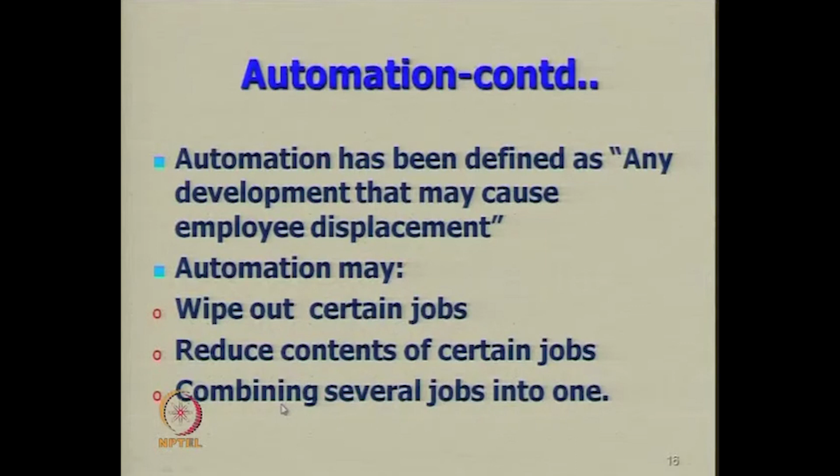And there being no conclusive evidence that it wipes out jobs is perhaps true only to the extent that it applies to the word 'certain jobs'. Yes, certain jobs are wiped out, but other jobs may be created. It reduces the contents of certain jobs, which it does. Remember what I told you in the preceding session, the character of job descriptions change. It could also combine several jobs into one.

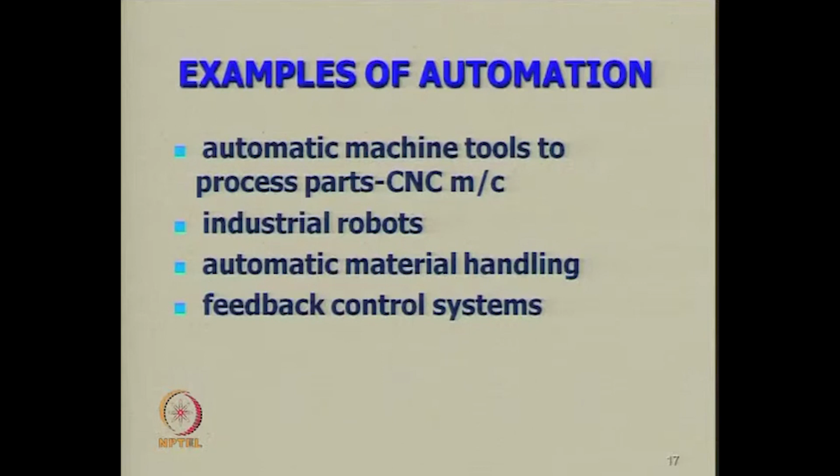Examples of automation are automatic machine tools to process parts, that is CNC, industrial robots, automatic material handling, feedback control systems. These examples are fairly self-explanatory and we need not spend time elaborating them.

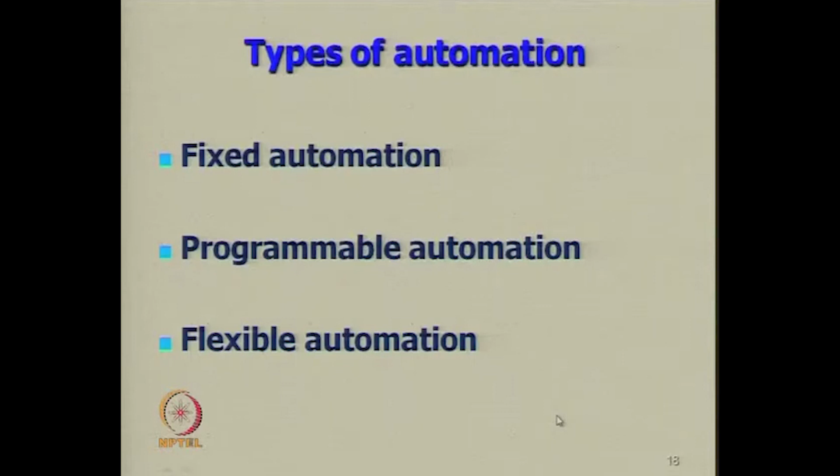There are different types of automation: fixed automation, programmable automation, flexible automation. And it is not as if these are the only possible types of automation, there can be other types.

Fixed automation refers to the use of custom engineered, that is, special purpose equipment to automate a fixed sequence of processing or assembly operations. This is also called hard automation. The primary drawbacks are the large initial investments in equipment and the relative inflexibility. GE is 2 million light bulbs.

Programmable automation is when the equipment is designed to accommodate a specific class of product changes, and the processing or assembly operation can be changed by modifying the control program. There is a technical meaning to programmable automation, just as there is to the other two types. It is suited to batch production. Reconfiguring the system for a new product is time consuming because it involves reprogramming setup for machines and new fixtures and tools.

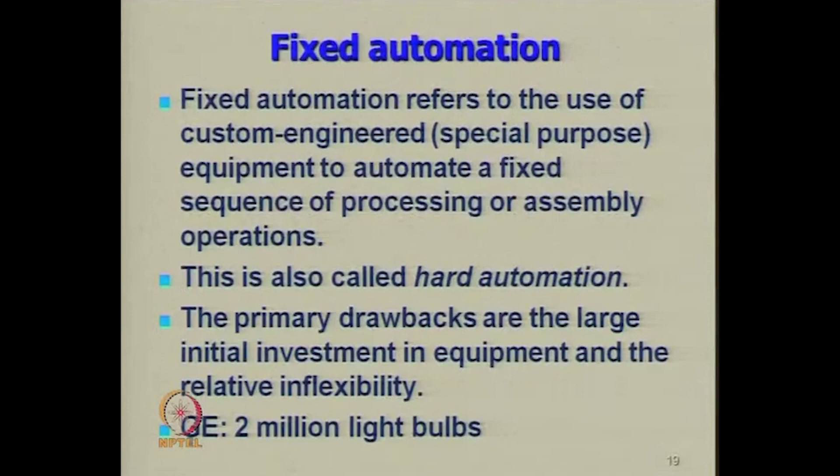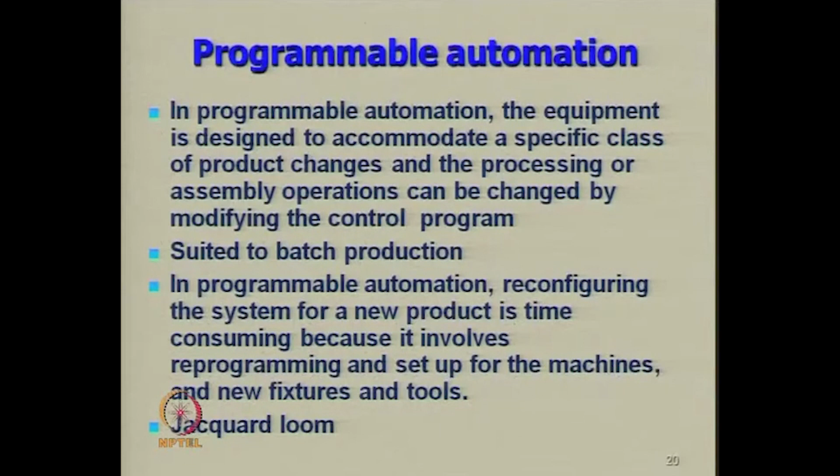All that you have to keep in mind is organizations which deal with flexible automation will be designed differently from those designed for fixed automation. Fixed automation will give rise to one class of organization design, programmable automation to another kind, and flexible automation to yet a third type. Therefore, the proposition you need to register is that organization structure and processes will reflect the kind of technology.

Now, for those of you interested in supply chain management, you can hardly be an expert without understanding organization structure and processes, because to operate that kind of supply chain management, you need a kind of organization whose nature has to be understood even by the technical hand. A little while ago, I was in conversation with two others who claimed they were interested in supply chain management, but they have a total inability to understand how supply chain management works, where the triggers of control are, and the triggers of control will always be in organizations.

So, types of automation, advantages and disadvantages. Let us put it in a matrix form. Automation, we have just noticed, can be fixed, programmable, flexible. The chart talks of when to consider, what are the advantages and what are the disadvantages. I am going to leave it on the screen for a while for you to read through, and then I will make some comments.

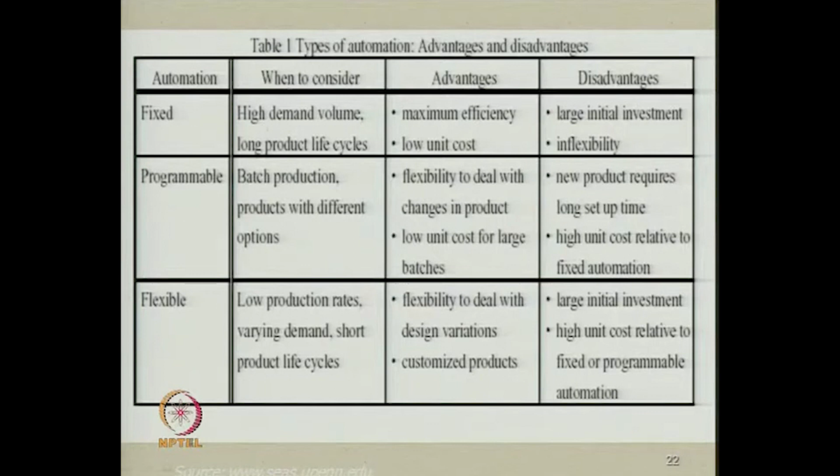Now, it is important to understand this matrix because it helps you to register concerns of project selection. If you want to start a unit, what kind of investment capability you have will be a prime determinant of what kind of plant you want to set up. And your selection of the kind of technology for that plant will, up to a point, be determined by your ability to understand types of automation, advantages and disadvantages.

So, the whole thing about organization management is the ability to understand interfaces. And in fact, to be outstanding in your own functional choice, a sound basis and insight into the processes of organization management is an absolute must.

Now, let us look at the issues of product variety and production volume.

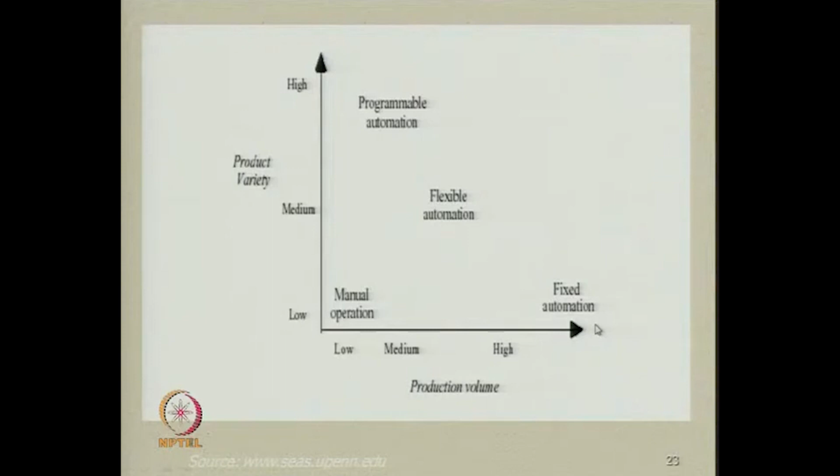There can be many reasons for automation. Shortage of labor of certain type. There may not be an absolute shortage of labor, but there may be a shortage of labor of a particular type. For example, in south of England, there is a shortage of masons. In USA, there is a shortage of nurses.

In fact, your best chance for migrating abroad is to pretend you are a nurse. And if you do not get my tongue in cheek comment, of course, I have no use of making that comment.

Labor, like money, rushes to fill the shortage points. Flow of capital is always from centers of high concentration of capital to centers of low capital availability. That is a law which applies not only to capital, it also applies to labor. Only thing is that the surplus and the shortage would not be judged on the ethnic dimension.

You won't say, we want more Indians to migrate or we want more Bangladeshis to migrate. You would say we want more masons to migrate, and the immigration policy of any state has to do with plugging in the shortage areas or the high cost of labor.

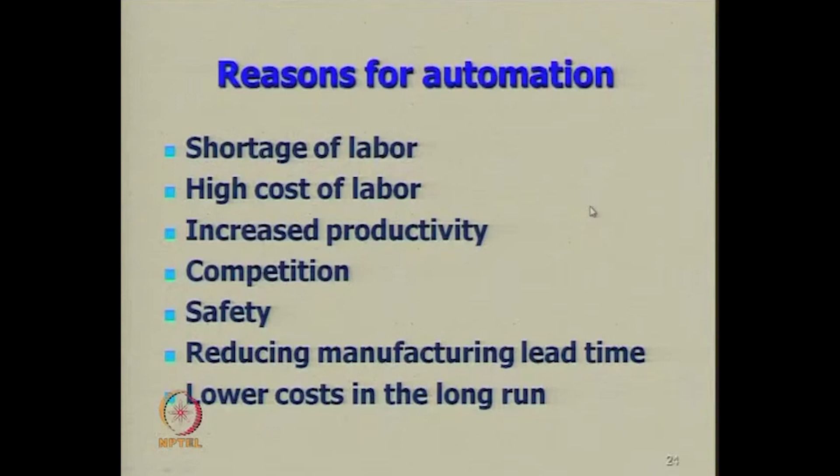So, predictably, if there are certain preconditions when there is a reason for automation, the reverse of that will cause a resistance to automation. If you do not have a shortage at a certain level and you introduce automation, then there will be a resistance.

Cost of upgraded labor also leads to a situation where there is a resistance to automation. In other words, the issue of new skills will be a resistance to automation, because automation can only be on predictable skills. Automation can only be on replicable skills. Automation can only be in skills which have got predetermined contours.

It will be also a factor of initial investment. Management of process improvements, issues of re-engineering.

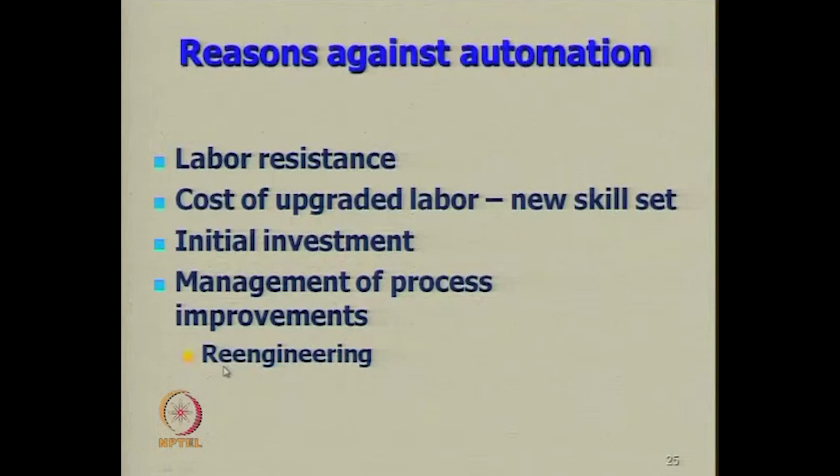Adapting organization to a new technology is always a complicated issue. Changes may come in two ways: policy decision to modify objective to get more advanced system of production, and standardization of product. Result of technical and administrative development, which will require a readjustment period and degree of technological potential attained. Both these factors would lead to adapting organizations to new technologies: policy decisions and wanting more advanced systems of production, or results of technical and administrative developments.

The impact of technology could be in the form of disproportionate time spent on evaluating technical aspects in comparison to study its effect on organizations. Ways to avoid discrepancies: change technology to adapt to organization structure. We have already discussed that when we were looking at different modes of production.

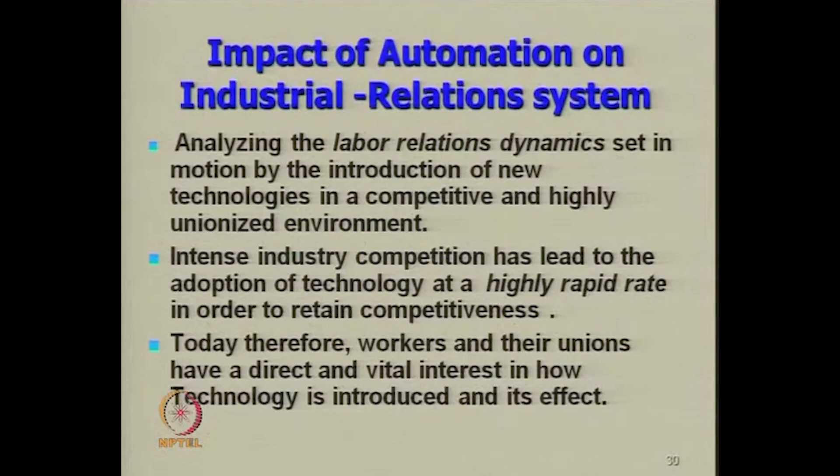Today, therefore, workers and their unions have direct or vital interest on how the technology is going to be introduced and what will be the range of its effect. Usually, you will find even if a technology is introduced at the bottom of the pyramid, it will affect the characteristics of the job above the bottom level too. That would be a bottom up effect.

What shapes the decisions of an employer to invest in automation? Will unions impede the diffusion of automation, and to what degree, if any? What impact will unions have on lag between the introduction on commercially available automation and its diffusion in manufacturing? The experience varies from industry to industry.

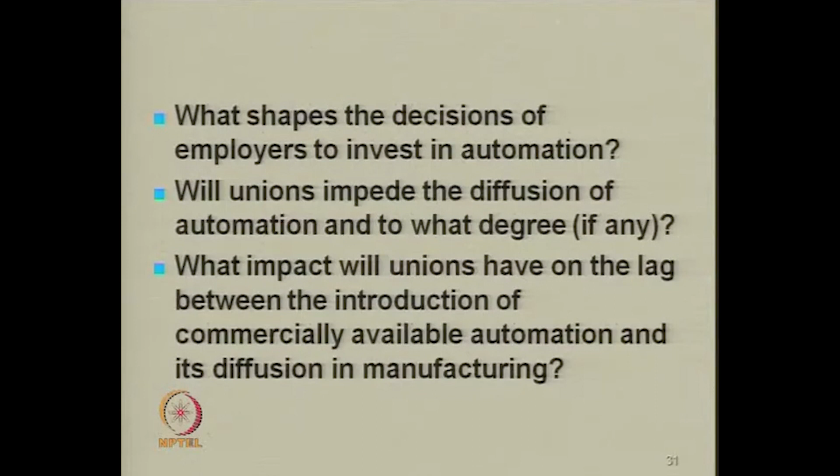It is very high in certain industries. For example, this question is now almost a moot one in telecom technology. The role of unions there has been reduced to less than 10% of the total impact, but it is still very high in certain other industries. So this question is only to be answered in the context of the specific industry, the constancy of prerequisites, and the consequences of effects.

What is the worker's perspective? What will be the degree of displacement? What happens to displaced workers? What proportion will be retained by employers? How many will be laid off? What kind of changes in work rules will unions seek, and what kind of changes will unions gain? What will white collar workers seek? Will white collar workers seek union representation?

What has happened over a period of time is that these kinds of questions have been politicized, and when they have been politicized, you find that they have become a political stick to beat a decision with.

The recent example of the agitation with the airport authority when the privatization of Delhi airport came along is a classical example. There were no production issues involved. In fact, the relocation was minimal, yet it became a big issue. And predictably, since it was not backed up by implications for productivity, it could not stand scrutiny.

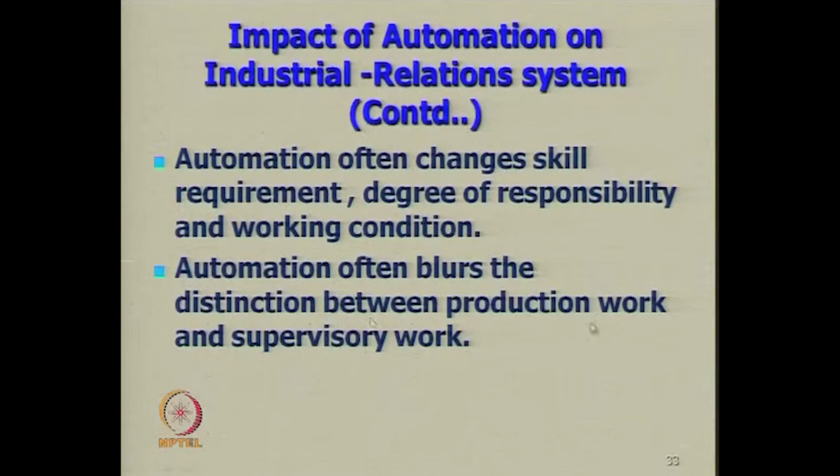Automation often changes skill requirements, degree of responsibility, and working conditions. Automation often blurs the distinction between production work and supervisory work.

Then there is the question of wage settlement, which is an annual ritual in a lot of the industries, especially in the manufacturing sector, even in the process sector. Periodically, wages have to be renegotiated and settled, and union relations become a very important dimension there. Then you hear of issues of collective bargaining and negotiations, which are essentially human resources issues.

What is the way out? Collective bargaining. It helps workers negotiate and settle with employers on reasonable and humane protections for workers against potentially adverse effects of job-destroying technological innovation.

What is being said is technological innovation could have a job-destroying effect. As I said, I do not know whether it can be called job destruction in a large number of cases. It is probably just a question of job redefinition or recasting the job. Collective bargaining can provide cushions to soften the adverse impact on workers by setting up adjustment procedures and programs at the workplace. Applications of new technology should be humane for workers as well as profitable to business.

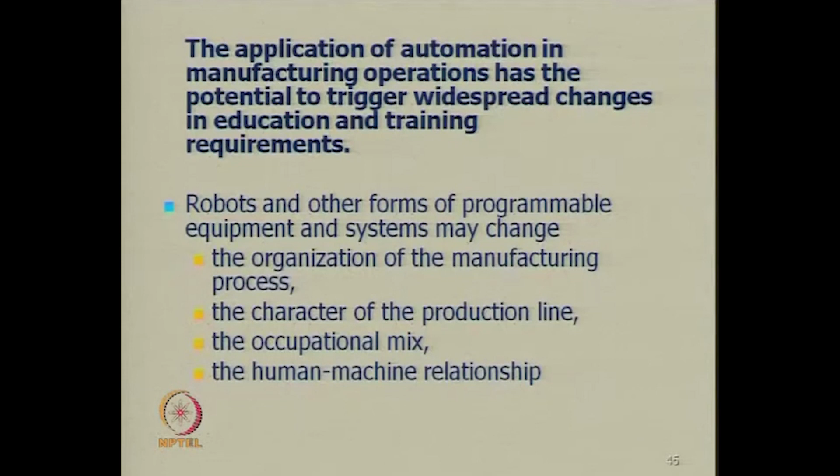Obviously, then it affects the man-machine relationship and it affects the future design of organizations, which is the theme of these sessions. What kind of skill mix you have, what kind of tasks you have, will design the jobs for you, will design the upkeep of the jobs, will design the upgradation of skills on the jobs. With that, we are going to stop before we start wrapping up with the positive side of training, and get into issues of computerization.